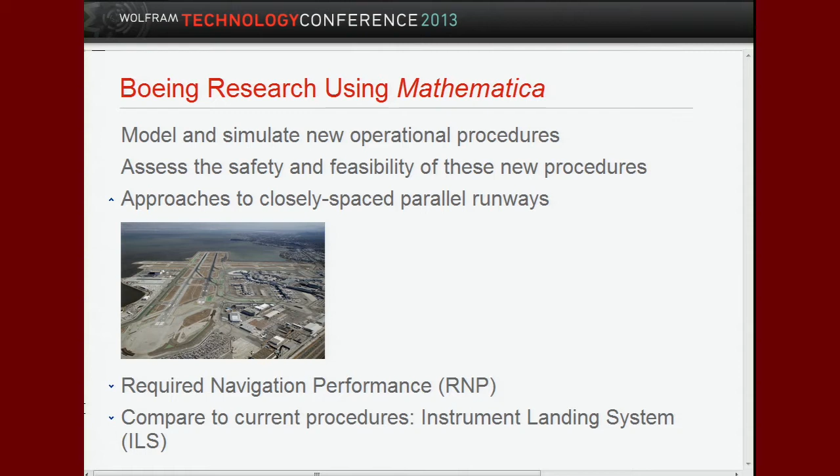Next, we look at what are called required navigation performance procedures. Now, required navigation performance is a standard, but it's also a technology. It depends who's talking about it. But you have technologies which go into making an airplane capable of meeting the required navigation performance.

Mostly, it applies to the lateral performance of the aircraft, but it can be applied in all phases of flight. And there are movements to make it apply to all the dimensions of the aircraft motion, but right now it's mostly lateral, and the technologies control that variability.

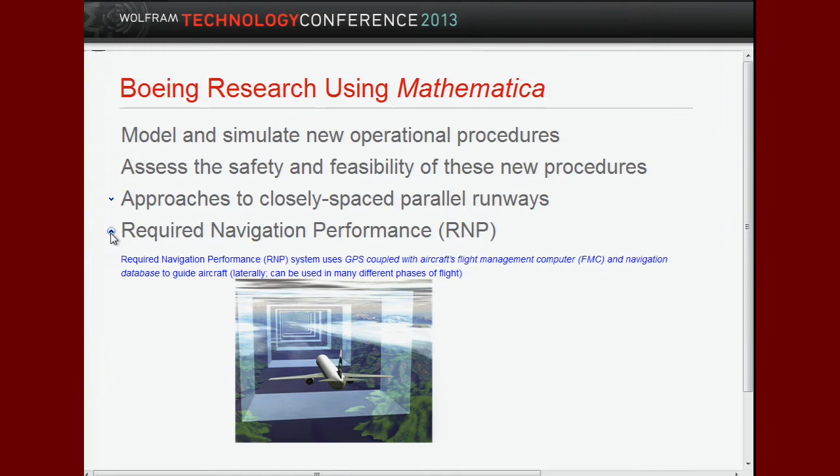Next point. What we're comparing to today are standard ILS procedures, which are ground-based technologies, an antenna on the ground near the airport, near the runway, that guides you laterally and vertically, glide slope and localizer. And required navigation performance puts more of the responsibility on the aircraft itself using satellite navigation.

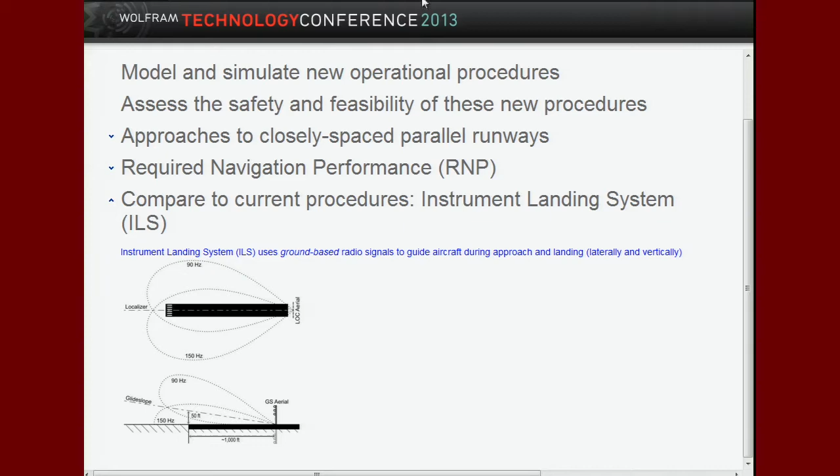So, what's the motivation for all this? The FAA is very interested in it. First bullet. They have a thing called the NextGen Initiative, a multi-billion-dollar, multi-year project to improve air traffic management in the U.S., mostly at the largest 35 airports and mostly for air transport category aircraft, although of course they have to consider general aviation as well.

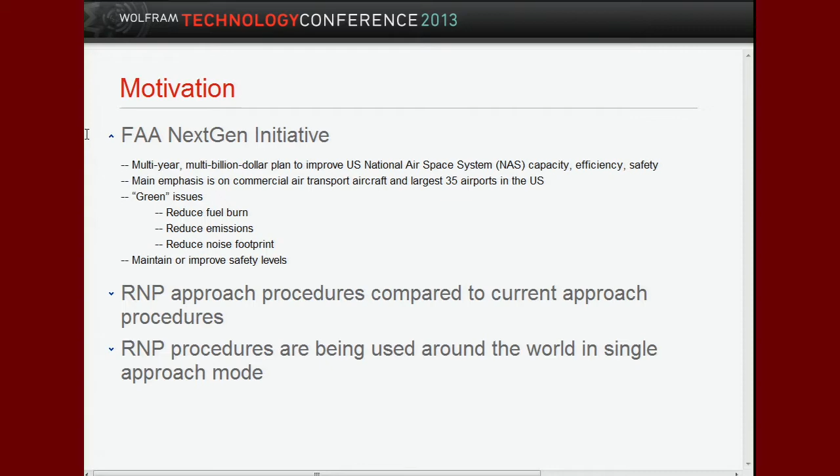And then a lot of the initiatives are green issues, reducing fuel burn, reducing track time, reducing emissions, reducing the noise footprint. And what we're interested in showing you today is research we've been doing related to safety analysis. Now, RNP procedures compared to current procedures.

Here's a picture of actual radar tracks at Kelowna in BC, and the magenta lines are the standard approaches, the current procedures where controllers vector the aircraft from the downwind onto the approach into the airport. And once they acquire the ILS, you can see it gets straight, but they have to acquire way out here. So it's a long, long path.

Now you notice the yellow line there, that looks like a single line. It's not. It's multiple approaches, just like the purple lines. But those are the RNP approaches. And you notice it's much closer in. It's more accurate, it's more predictable. And it saves fuel, it saves time, it saves emissions. So that's why we're interested in this.

But this turn-in close to the runway, giving the responsibility to the aircraft to do that based on its own navigation, based on GPS and its flight management computer, is a safety issue. Any new technology, any new procedure obviously has to go through a lot of scrutiny. So that's why we're looking at this sort of thing.

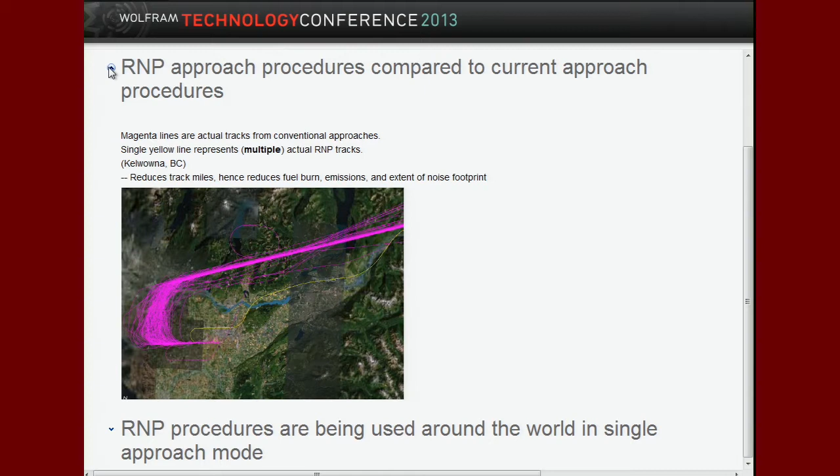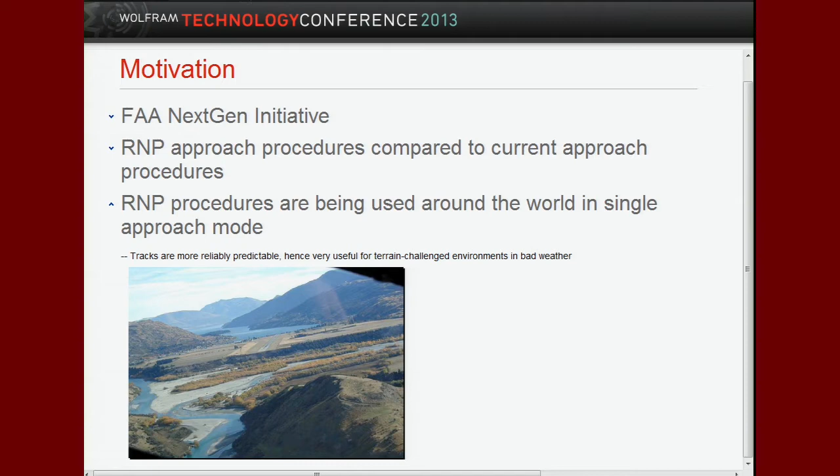Actually, if you go to the next slide, this kind of procedure is well accepted in the world for single approaches. As a matter of fact, Alaska Airlines pioneered this in approaches to Juneau. Now, this is not a picture of that, but in the Gastineau Channel, going many miles through, flying between mountains in the fog, in the clouds. They do it all the time. But, next slide, what we want to do is extend this to traffic.

Airplanes not flying against mountains, but airplanes flying against other airplanes. That's what we're all about right now. That's what we're going to talk about today. So that's the first point.

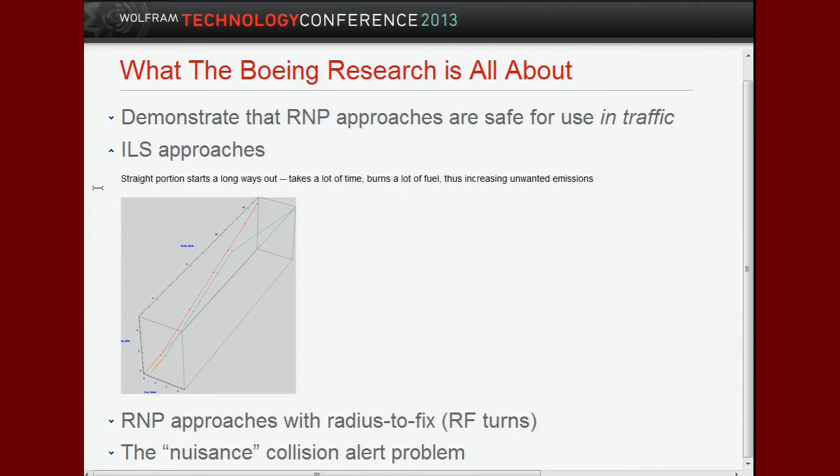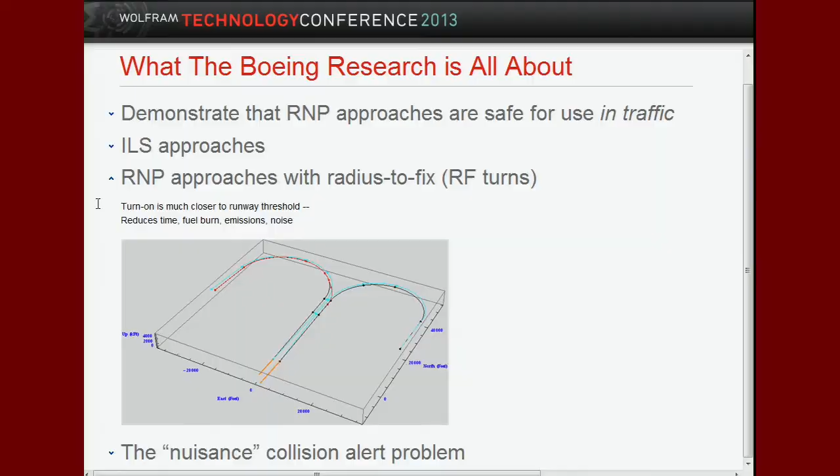The second point is that ILS approaches, I've said this before, I'll say it again, and the approaches, this is a Mathematica picture of some of the approaches we look at. They're very long. They have to start way out straight, come in straight. And in contrast, what we're looking at are RNP approaches with a so-called radius-to-fix turn. And that just means there's a center defined, there's a radius defined, and you turn in very close to the runway. You save time, you save fuel, and emissions, and all that good stuff.

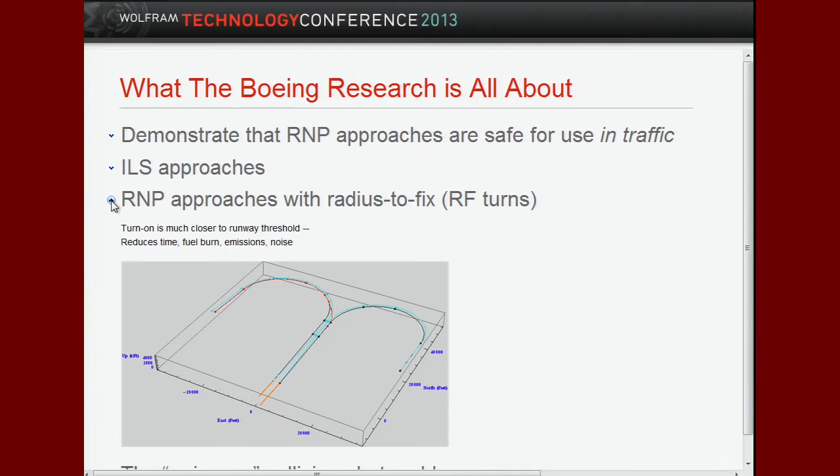But you'll notice in that picture that the airplanes are kind of pointed at each other. That makes people nervous, real nervous. So you want to know, how can I do that safely? Well, the next picture will show you a little bit about some of the issues. One of the issues that we're going to talk about today is the so-called TCAS nuisance alert problem.

TCAS stands for Traffic Collision Avoidance System, and aircraft of a certain size with a certain number of passengers have to have it. And aircraft that have it communicate with each other, talk to each other, and they say, you're getting too close, now you're really getting too close, now you got to do something, get out of there. And so you have to design the procedures so that you don't get those alerts. Of course, you want them if you're really going to crash for some reason. But you don't want them arising just because your geometry was stupid or your speeds were stupid or something like that.

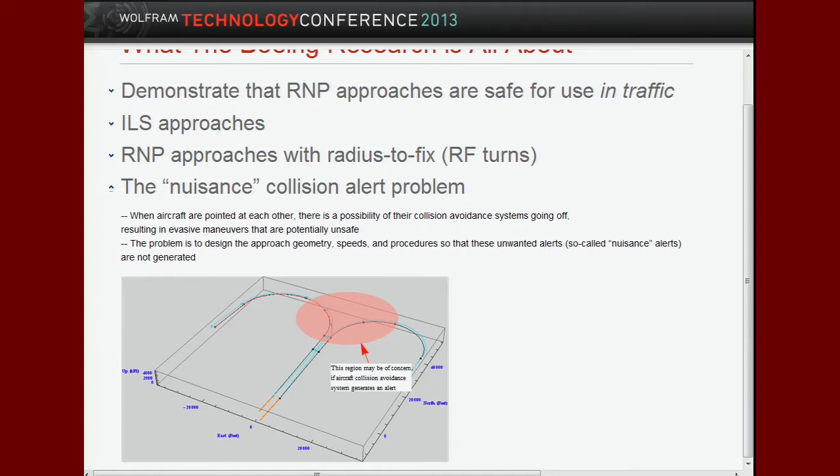So you have to design the procedures so that the aircraft don't quite come together to cause the nuisance alert or cause the alert to go off. So that's what we're going to talk about today. We've done a lot of safety analysis on a lot of different things, but we don't have all day, so we're going to just focus on this one topic.

So how does the collision avoidance system work? It's called TCAS. It's pronounced TCAS when you talk the jargon. It stands for Traffic Collision Avoidance System. There's basically two kinds of alerts. There's a traffic advisory and there's a resolution advisory. And in the cartoon here, you see this is our aircraft. You're flying in this one. So you're concerned when you see an aircraft coming right towards you here, or not necessarily even right towards you, but on a collision course.

And then there's kind of protective shells around you. The first one is the TA region, where it says, hey, there's traffic out there. Look out for it. Don't do anything yet, but it's there. So this is kind of a notice. If you get to the RA region, that's bad. You're about to crash, do something. And it's usually a cooperative maneuver where one aircraft climbs and one descends.

The reason they don't turn is because the bearing information from TCAS is very bad. So you don't know exactly where that guy is in angle, in azimuth, but it's very accurate in altitude, so you climb and descend. Or one may climb and the other keeps going, but it depends on the situation. In altitude, you have very simple criteria, just 600 feet for a resolution, 850 feet for traffic advisory.

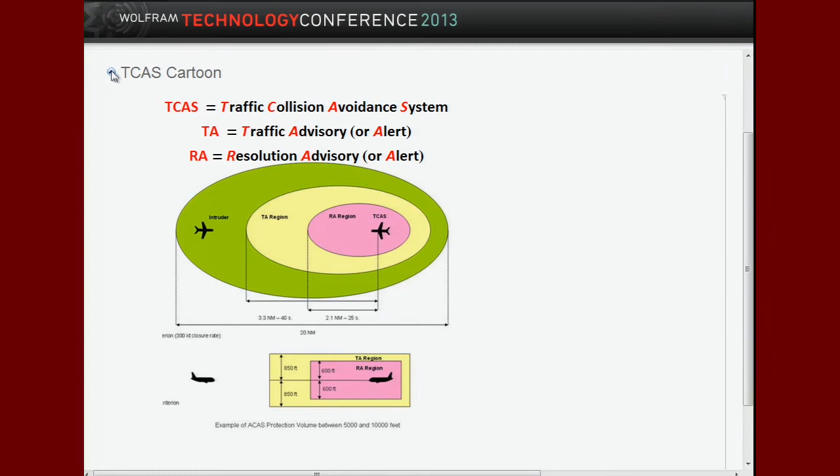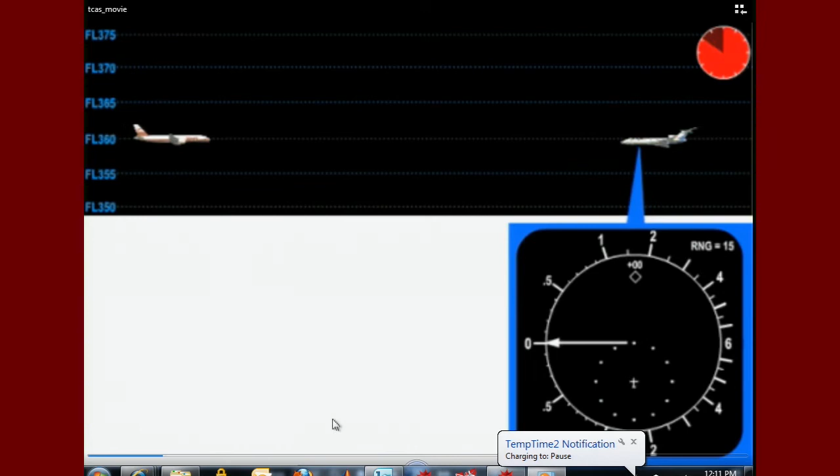Now we have a little animation to show you. Let's see if this works. We're going to do the MP4. Now the sound is going to be out of sync because we have to start this separately to make it bigger and go faster. So you see two aircraft coming toward each other. This, by the way, is the pilot display. This is the airplane you're in. Right here, it stays steady. This is the intruder coming down.

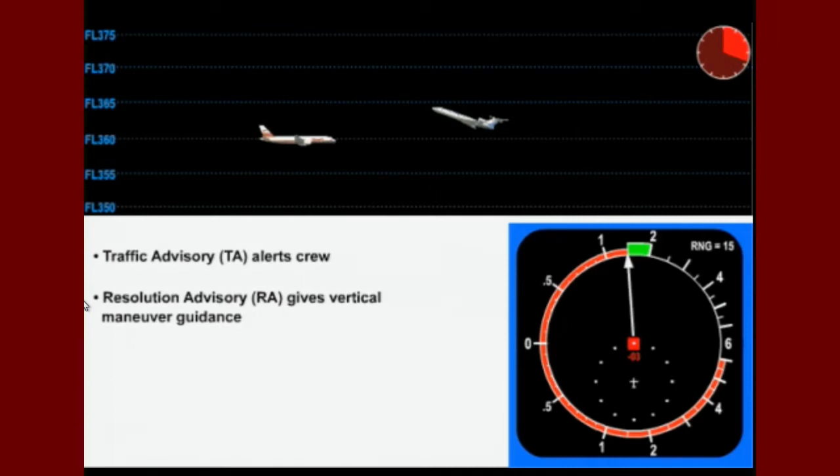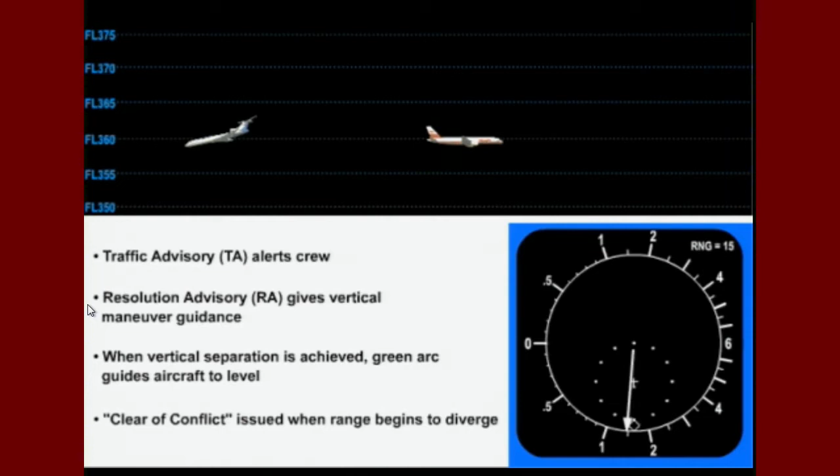Oh, we got the traffic. We lost the sound. Anyway, you got the TA already. Now you got the RA. Oh, there it is. There's the sound. So now this guy's climbing. The other guy's not descending. I don't know why in this particular situation. But anyway, he doesn't listen or something. And then once he's passed, he descends. And so here's our airplane. This guy's behind us, so we don't care about him anymore. So now we can go back down to our flight level. Okay? So that's how a TCAS encounter is supposed to work.

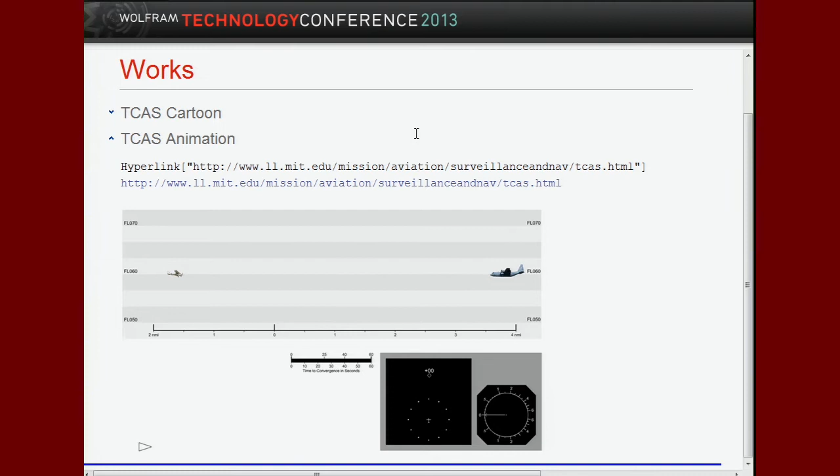Okay. Is that part of the autopilot, or is that a manual procedure? No, the pilot has to do that. It's not wired into the autopilot. The pilot is supposed to respond. And he's supposed to ignore controller instructions at that point in time, which has been a problem in the past. For those of you who know about the Überlingen accident between the Russian airliner and the DHL freighter several years ago. Anyway, okay, next slide.

You go through the door. I'm going right. You're going left. Oh no, you go that way. I'll go. No, let's dance. That sort of thing. That's not in here. It's supposed to work simply.

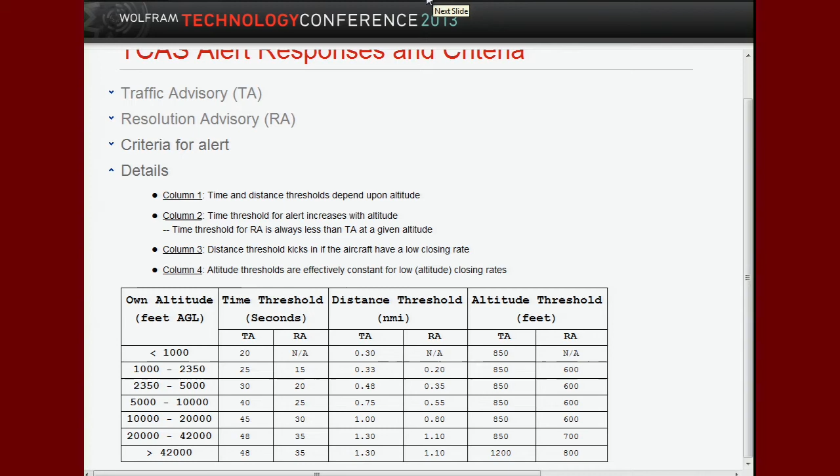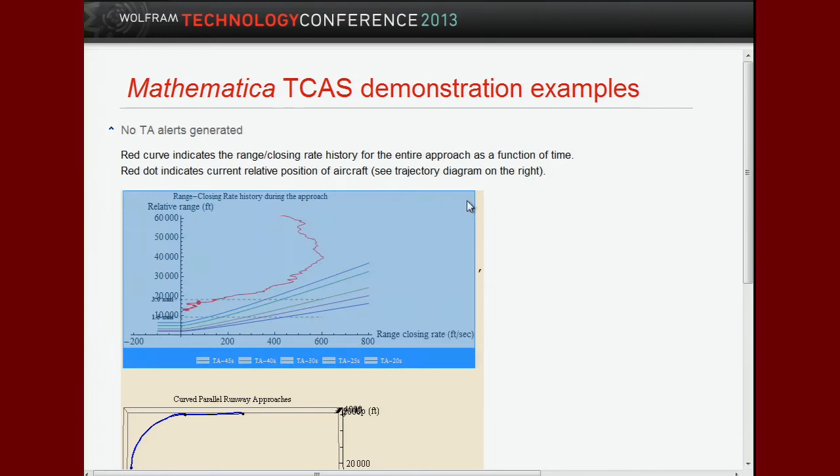Let's look at one where they are generated. In this case, they obviously got too close together. As a matter of fact, they're side by side. So when they came right here, they started generating alerts, or at least potentially, as you can see, going below the threshold.

Now, if the altitude threshold had been met at that altitude where the thresholds are defined, they would have gotten an alert. This doesn't necessarily get one. It just means that you have the potential for one if all the other criteria are satisfied at the same time. Okay, next one. That was for TAs.

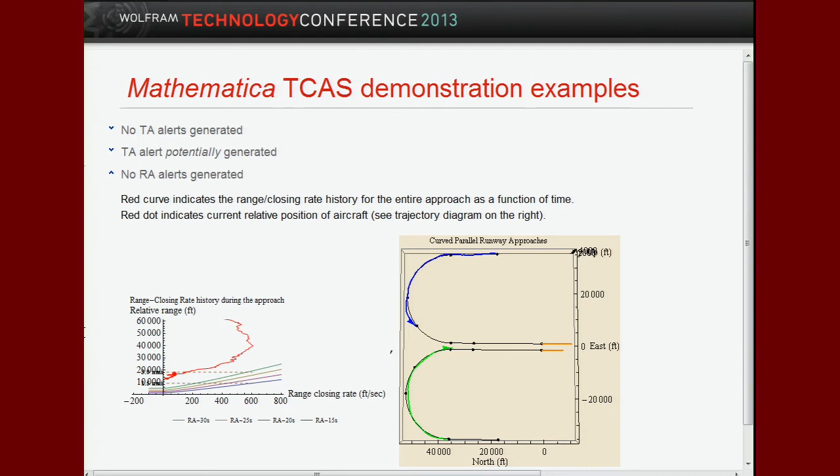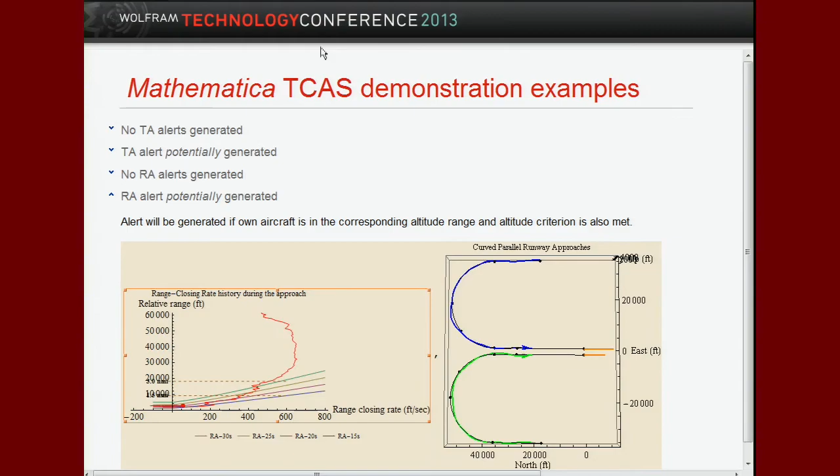This is the same deal for RAs. The only difference is that these constant timelines are lower slope. It's the only difference. Everything else is the same. So obviously you don't get an alert there. And finally, if you're nose to nose, you're going to get a potential for some alerts here. Okay? All right. So now we can go to the real interactive demo.

So let's pick a few bookmarks. Buffer lead means I'm giving this aircraft a really big buffer, even more than 1.5 nautical miles, so you're well above all the alerts. Now let's look at some of the buttons. Let's switch RA and TA. You can see the lines go up and down, just switch back and forth a few times. You see the difference, the TA is higher, the RAs are lower, so you're going to hit a TA before you hit an RA.

The RNP levels are basically the noise in the airplane tracking. When we turn up the RNP level, it means it's allowed to have more error in its flight path. When we turn down the RNP level, basically that means there's less error in the flight path. So vary that a little bit. See how it gets jerkier when you turn up the RNP level?

Now in our simulation, of course, we don't just have two. We have any RNP level you want. And we have all kinds of variability vertically, laterally, longitudinally. But we're just demonstrating one of the parameters we can vary here. Now, let's go to the last one, separation violate. So this is a bad case where they got really close to each other, less than 1.5 nautical miles apart. So they're going to have some potential violations.

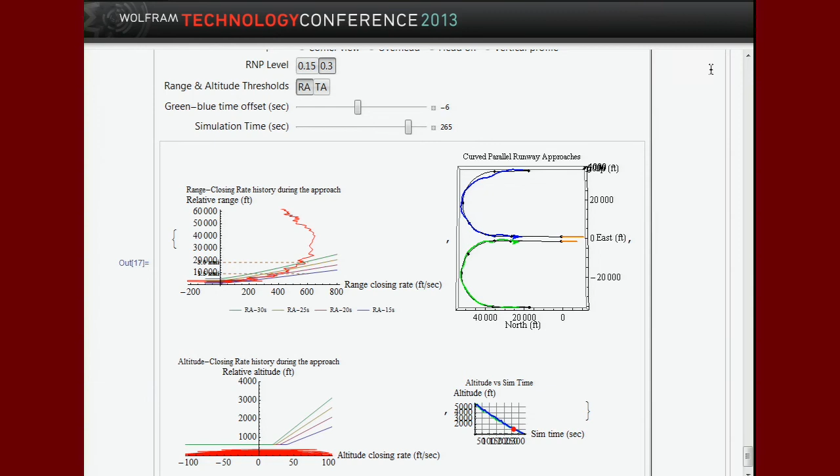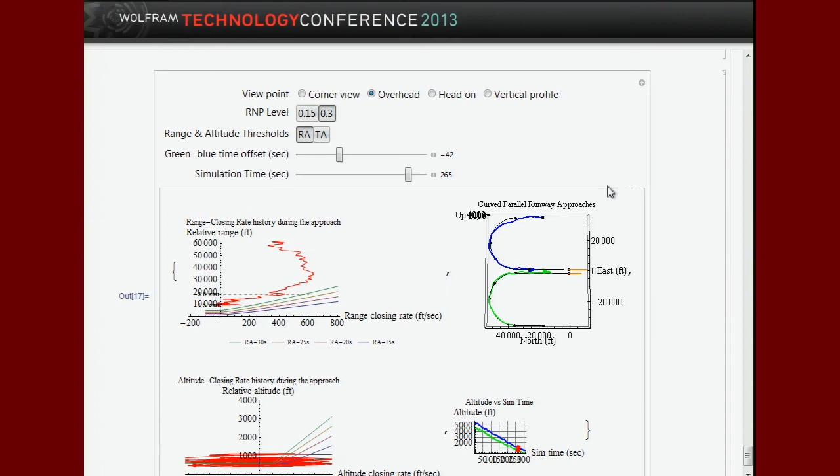So let's go back to one of the normal ones. Let's go normal lead, and then let's just run. Let's just play it on simulation time. Now you'll see a red dot come down the line. That red dot corresponds to the position of the aircraft over there.

So you can see their history of the collision time. Time to collision is a red curve. You can see what that is based on that trajectory. This happens to be a trajectory where they never go below 1.5 nautical miles, so they're good. They're doing what they're supposed to do, so they don't have a potential alert. Okay? Now let's try it with the offset.

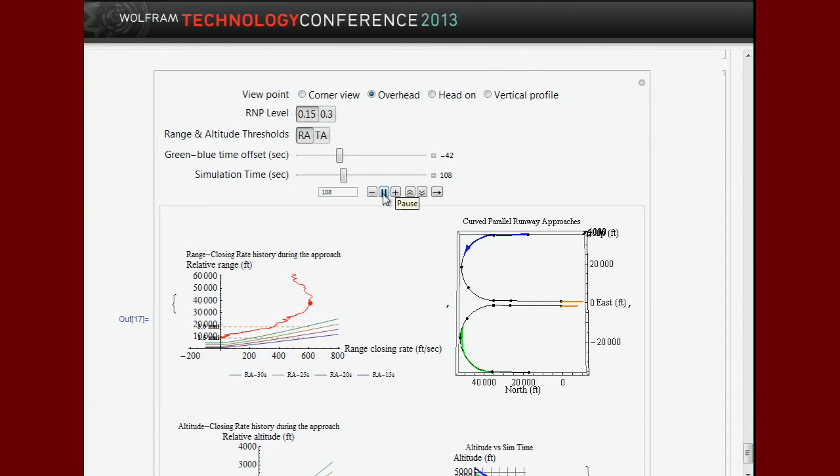What's the offset? The offset has to do with how soon the green aircraft starts after the blue aircraft starts. In other words, it's how ATC sets up the approach so that one's ahead of the other, and he's got to plan it in his head so that they don't go below 1.5 nautical miles, in the face of winds and all kinds of other things.

The nice thing about RNP is the controller is set and forget. Once he sets it, he's monitoring, of course, but the aircraft is expected to be on rails after that point. In other words, it's what we call RNP established. They don't have to worry about them anymore, just like an ILS approach today.

Once they get that beam, that radio beam that guides them to the ground, the controller basically says, I'm forgetting about you. I mean, of course they watch him, but they basically don't have to worry about him anymore because he's got guidance. Same way here with RNP.

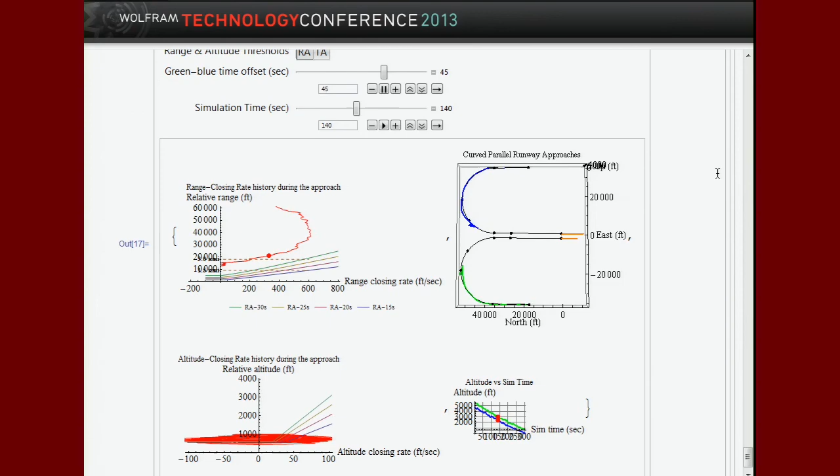Now what you'll see is this curve goes up and down as you see the changing in the starting point, right? How they're starting relative to each other. And sometimes they can get below the 1.5 nautical miles and get into the danger zone where they might get a traffic alert, okay? Okay, now we can stop this and go to the next one.

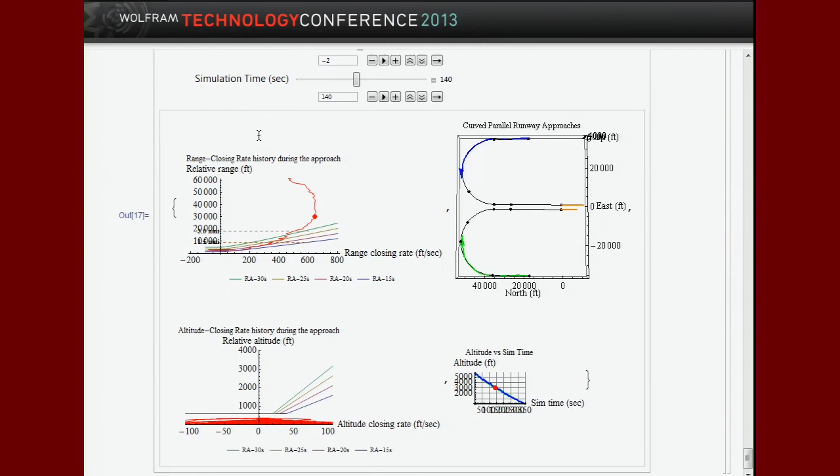So this is great for intuition and visualization, and by the way, this is how we got a lot of our ideas about what kind of analysis to do. So what do you have to do to make it be useful to the FAA or any other regulator? You have to do some Monte Carlo simulations. So we take this basic model and we run thousands and thousands.

Well, it depends on which kind of safety analysis we're doing, but in some cases, tens of thousands of approaches, and various things, like the longitudinal, vertical, lateral variability. Then we also vary systematic parameters like track geometry, the speeds, the altitude profiles, the wind effects, and the runway spacings, because different airports have different runway spacings.

And then as outputs, we look at several criteria. One is estimates of near-mid-air collisions, mid-air collisions, the frequency of those. The regulators are very interested in keeping those down. And as a flying passenger, I'm sure you are too.

Estimates of the frequency of wake encounters, where one aircraft gets behind the other and gets in the wake vortex, and there's a control upset because the rotating vortex can make the following aircraft go into an unintended roll. And finally, estimates of safety margin to the nuisance TCAS alerts, which is what we discussed in this particular talk today. But we also do the other things as well.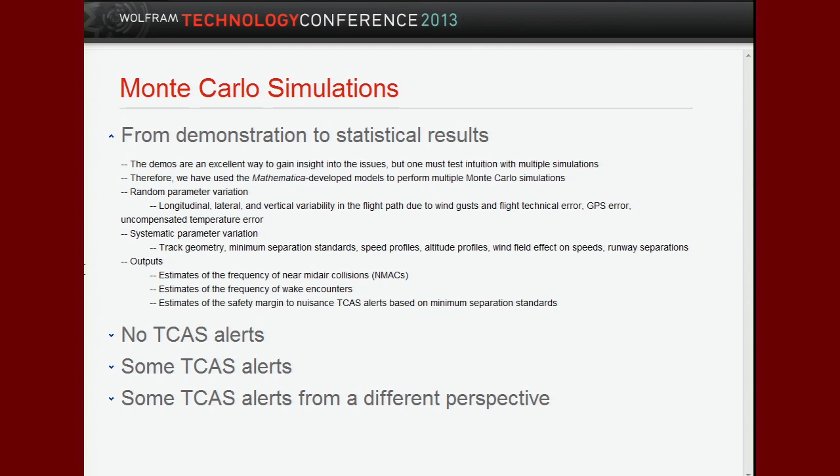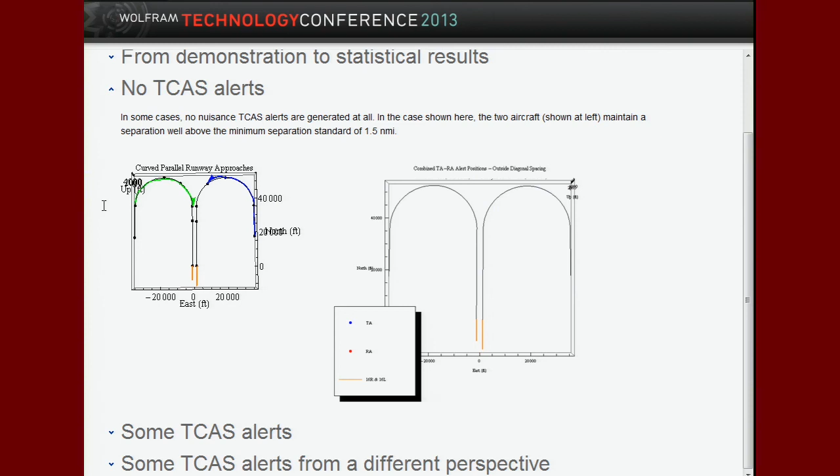So now I'm going to show you a couple of examples of some output. This is not very interesting because nothing happened. This is because the aircraft were properly spaced. See, the blue aircraft is well behind the green aircraft. And if there had been alerts, they would show up on this plot over here, but nothing showed up. So we're good to go for that particular configuration.

The next one, however, we had them side by side. Somebody didn't do their job. And now we're getting alerts. The blue are the TAs, the red are the RAs. Of course, the RAs are what people are really worried about, because that means somebody's got to do something that's bad. Because when an airplane has to suddenly do an evasive maneuver, he might hit somebody else, unintentionally. So nobody likes that to happen. So you want to avoid the red at all costs.

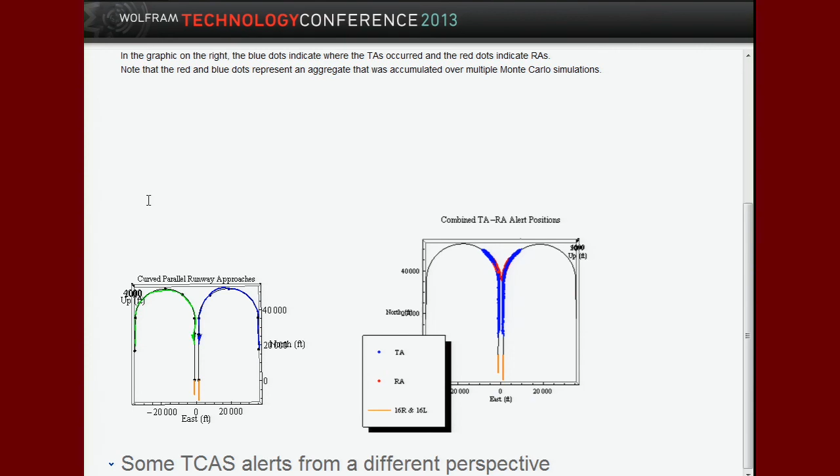And you can see, and this is where the Monte Carlo simulation comes in, because this plot is an aggregate over multiple runs with all the noise on the aircraft trajectories. So the red dots don't necessarily all come from the same approach. They come from thousands of approaches. So you can see that this is not good. This is what we try to stay away from. Okay, we're almost there.

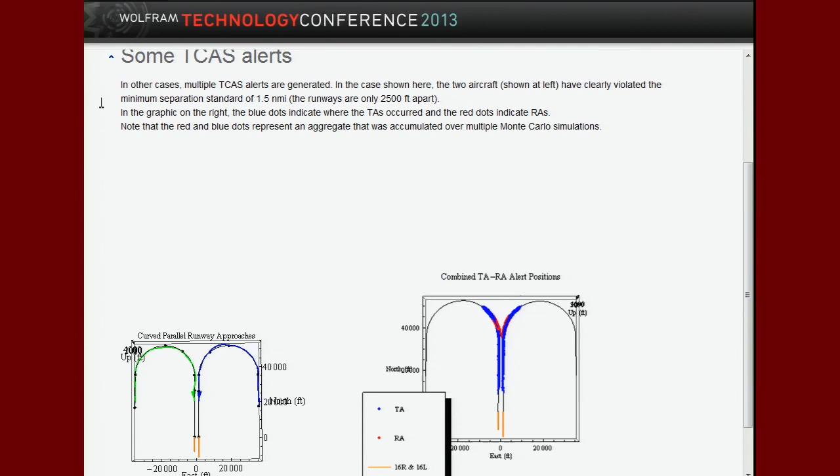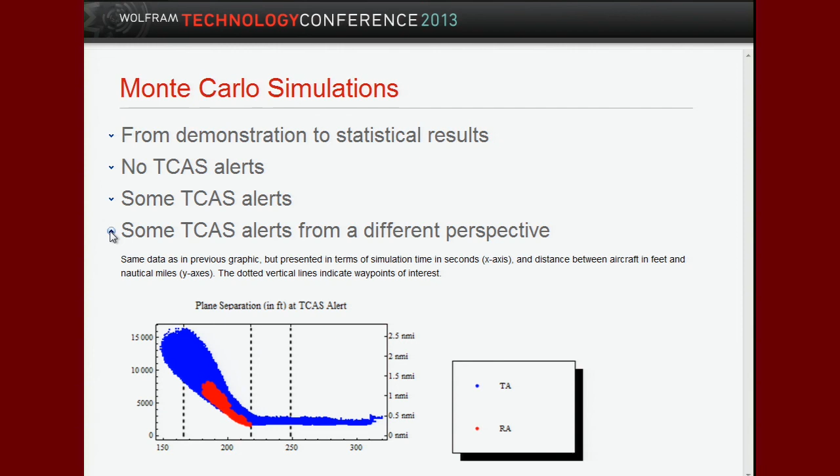And you can see, again, you get some RAs, which is bad, in this particular region of the simulation. And that's what you want to stay away from. This gives you a little bit better idea of what's going on, because these vertical lines are waypoints of interest. Pilots and controllers think in terms of waypoints. Where would this happen? What waypoint would you be near when this happened? This helps you see it a little bit better.